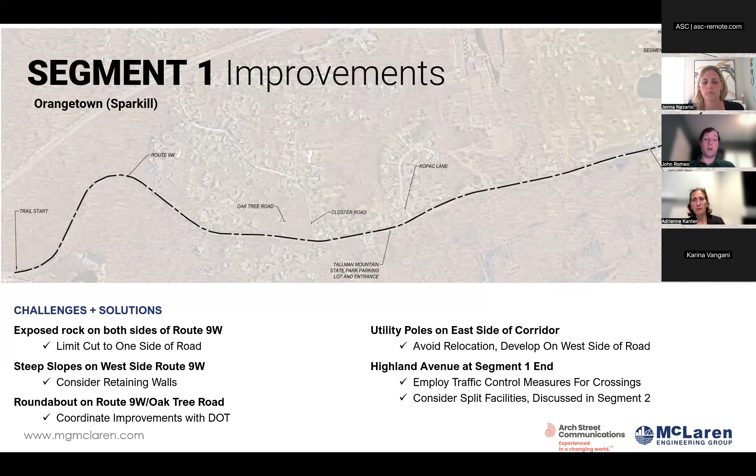Some of the other improvements we've talked about are warning signs for limited sight distance. As you saw on the previous slide, there's quite a bit of a curve, and we want to make sure people using this trail on either side of the road have safe ways to access it. So crosswalks, obviously with the Oak Tree Road intersection and all the problems there, that is going to be addressed. There are a number of other areas where we'll improve crosswalks, both the signage and with the addition of detectable warning strips—accessible strips placed on sidewalks to notify people that a road is coming and that there's a hazard there.

One of the things I ask all of you is to write in any recommendations for additional opportunities to connect. We have a lot listed here—trust me, there are quite a few more, but for the interest of time and space on the slides, we tried to condense this as much as possible.

Some of the notable ones in this area are the Lamont Earth Observatory, the Long Path, Tallman Mountain State Park, and the country club in Skunk Hollow. There are a lot of other items along this, and if there's anything you'd like to see us try to connect to with wayfinding signs—signs placed along the trail directing people—as well as interactive activities, please let us know.

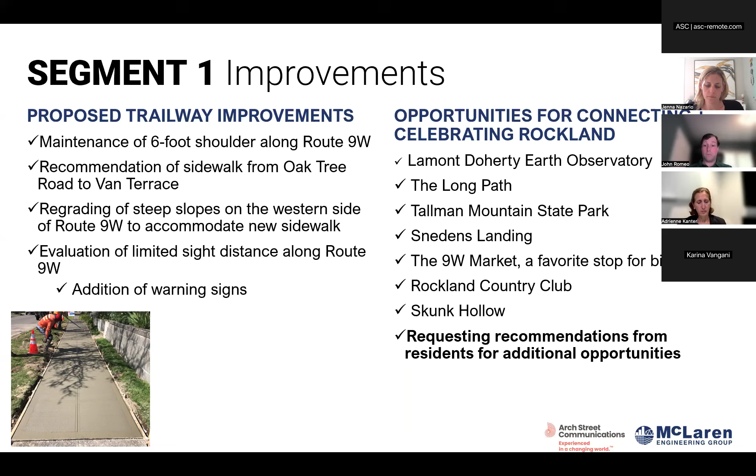Segment 2 picks up on Highland Avenue where segment 1 ends, going through downtown Sparkill into Piermont. This is a slightly challenging section due to the number of businesses here, and there are a lot of existing sidewalks and roadways. However, we have very, very narrow rights-of-way.

One of the initial plans of this project was to try to navigate people down Valentine Avenue. What we realized is that it's not really possible—there'd be detriment to the existing homeowners in this area, and we do not want impacts where we don't need them. So what we're looking to do, we've met with the mayor, and we're looking to come down Union and Main Street instead.

We're going to improve the existing sidewalks. Right now there are a number of telephone poles located in the middle of these sidewalks. We're going to be working with utility companies, the village, and the town to try to move these and widen the sidewalks as much as possible. Again, we're going to have improved crosswalks, improved signage, and anywhere we can improve anything right in our path, we're going to do that—drainage, other items, traffic control measures, things like that.

At the end of this segment, where we have the connection to the Joseph B. Clarke Rail Trail, there are a number of improvements we're going to be making to that intersection itself with enhanced signage. We are also looking to close the current entrance to the Joseph B. Clarke Rail Trail and direct it at a 90-degree angle. That trail currently crosses at a diagonal across this intersection, and from an engineering perspective, it is a hazardous situation for us compared to what it could be.

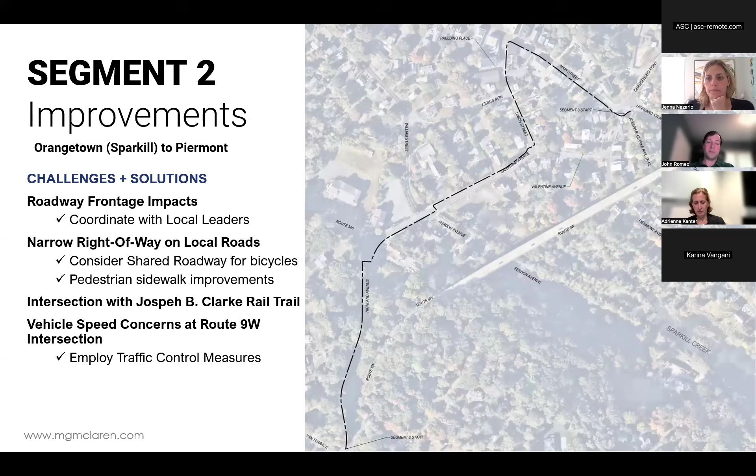Again, a lot of different opportunities connecting here. Sparkill restaurants, all of these types of businesses along here, we're hoping to include them in the wayfinding and in driving traffic. This is good for the community in that it will bring people to them, provide a safer path down to these items, and help the economic environment for everybody in the area.

New curbs, curb ramps, and crosswalks are really going to help people. And if we can improve the intersections and usability by moving poles and signs currently in the sidewalk, we really feel that this is going to be a boon to the community.

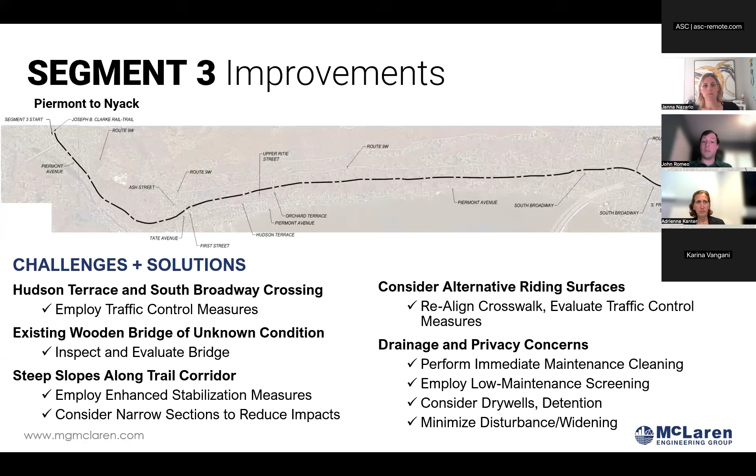Not specifically on this portion of the trail, but on some of the other trailheads, you'll see different wayfinding signs to other businesses. There are a couple cut-throughs to different businesses here, and we are looking to promote those businesses to make sure the community benefits not just from the trail improvements, but from the economic improvement.

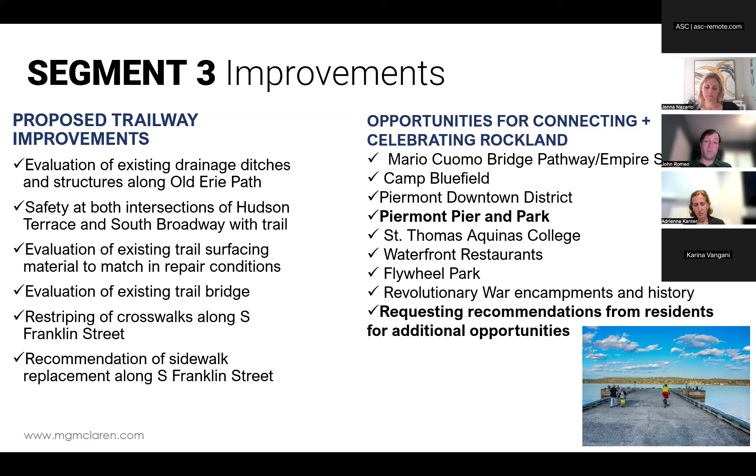So some of those connections we're going to be making: the Piermont Downtown District, the Piermont Pier and the park, St. Thomas Aquinas College. We're also working on a number of other projects, the Revolutionary War encampments and the Mario Cuomo Bridge pathway, where we will have direct connections. All of this is done to improve this existing trail section for all of the existing residents that live in the area. We believe they're going to be the primary beneficiaries.

Segment 4 is interesting in that we don't have a lot of major improvements in this area. Nyack and Upper Nyack actually recently went through some major upgrades to their infrastructure, widening roads, new sidewalks, new intersection improvements. So there's not a whole lot throughout the primary trail here.

What we're looking to do is actually split traffic. This is one of the only areas where we're splitting traffic with bicyclists and pedestrians, and that's due to the fact that we want to make sure that on North Broadway, we're promoting a quieter aesthetic. Everybody walking there, it's a little flatter, a little easier to go down, and because of their sidewalk there, it's better suited for pedestrians.

Whereas we can take the bicyclists on an alternate path to go down and meet up with them later at segment 5. This will also help connect the faster bicyclists who are going to be bypassing this through Old Mountain Road, where the existing state bike route is, back to 9W. So we have like 3 different parts of this.

One of the things that came out of discussions with the mayor of Upper Nyack is Old Mountain Road needs some improvements. There's kind of an asphalt sidewalk that goes along the path and leads to a small wooden bridge that needs to be improved, and there's some drainage concerns there. We're working with Upper Nyack to improve that, so we're going to have another connection to the school as part of this. This is one of those, like I was saying, not a pet project, but an adjacent project, so we can improve the safety and accessibility for the whole trail.

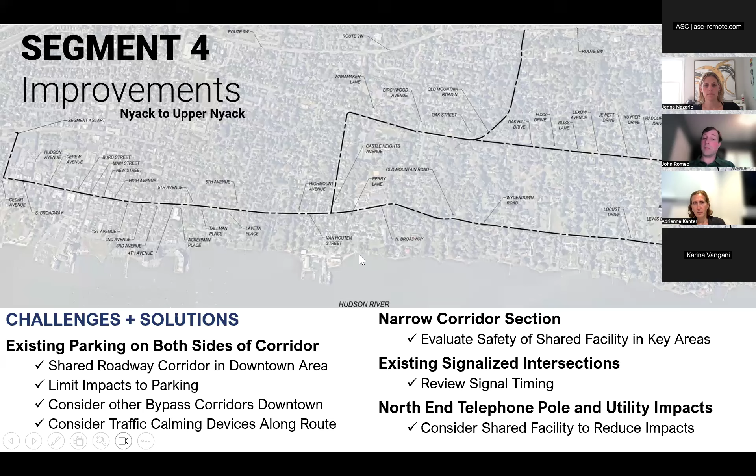So we can review signals and everything else in that area, or stop signs, a four-way stop sign, and other traffic calming devices that can help. There's other opportunities that we can connect in this area. In Nyack itself, I have reached out to Andy in the area, and he's going to come up with a better list so we can make sure we have wayfinding throughout the downtown. He's expressed interest in more interactive signage and items with QR codes so people can scan and get something right on their phone. I think that's great, and something we can do as we try to bring everything forward and be more modern.

We have another question here. Adrienne, I'm going to direct it to you. Yeah, great. So it's another poll question, and this time the question is: what safety elements would you most like to see along the trail? Please select all that apply. The options are widened sidewalks, shoulders, improved signage or signals around intersections, improved crosswalks, speed monitoring devices, improved drainage, and screening between the trail and private property. Please enter all that you consider important, and you have about a minute, and don't forget to click submit so your voice is heard.

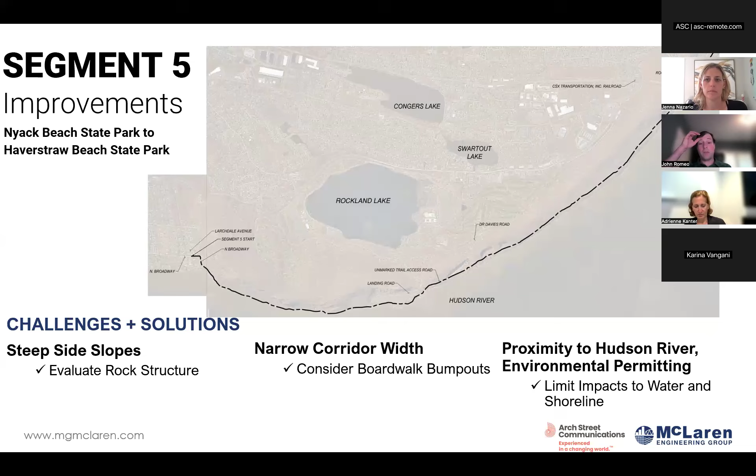The Palisades Park Group does a great job maintaining it already. We are going to try to assist them with improved drainage and other areas where they want it, and we're going to consider limiting other improvements in this area. We're going to have a number of benches installed. There are a bunch of historic artifacts and items that we can provide signage for, and we're going to provide different opportunities to connect to the different park in the area through this.

This is one of the things we did hear from the Palisades Park Group: segment 5 is actually a major commuting thoroughfare, and they want to discourage the use of e-bikes on it because of the danger they pose to existing residents and trail users. So this is something we're going to work with them on, to try to find traffic calming on the actual trail to discourage high-speed e-bike use. We don't want people ripping through at 30 miles an hour, disturbing some of the kids or folks using this trail segment. So this is an area where we are considering flashing signs. It's not set in stone, because that has an aesthetic detraction from the project, but if it only activates when people are traveling at a certain speed, we think it might be worth the improved safety it will bring.

Segment 6 is Haverstraw.

We have a number of different trail segments and options in Haverstraw that we are considering, some of which are not all shown. We are also working with McLaren KCI, as well as Arch Street, on a number of different projects in Haverstraw, so you might have heard us out and about. One of those projects is the Chair Factory, where you can see our bump out in this area where we have an alternate segment. We are trying to take into account other projects being built by others, or others we are also working on, to try to accommodate improved path options with this.

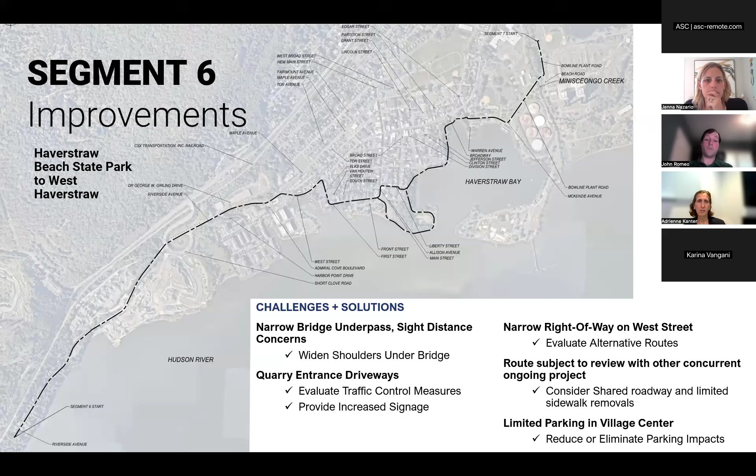There are a lot of different opportunities to connect here with Emmeline Park, where we want to try to improve Emmeline Park by having a separate trail come into it. We know that it is currently a safety issue for the fire department to try to access Emmeline Park and Donco Keys with the narrow road that's there. So if we can provide an alternate path for emergency vehicles, we are going to do that. That is something we're working on with Max Stack from Nelson Pope and Voorhees, who represents the village in this matter.

We are also looking at installing wayfinding signs to connect downtown. As I mentioned in some of the other segments, bringing people downtown will really benefit the community here, bringing everybody into all the shops, so this is something we want to do. We also know that the ferry here is something a lot of residents in this area might want to use to get to the ferry. It's going to improve accessibility to public transportation, especially with everything going on in this area in Haverstraw with all the new projects and new residential projects being built. Having this trail is really going to help accessibility.

So we have another question. Adrienne, I'm going to turn it back to you.

Yes, thanks, John. So this is the latest poll. When I use existing portions of the trail, I most often - please select one of the following options: use the trail by myself, use the trail with one or two other people, or use the trail with a group of more than two people. So please select the option that best reflects your typical use of the trail, and we look forward to seeing your responses.

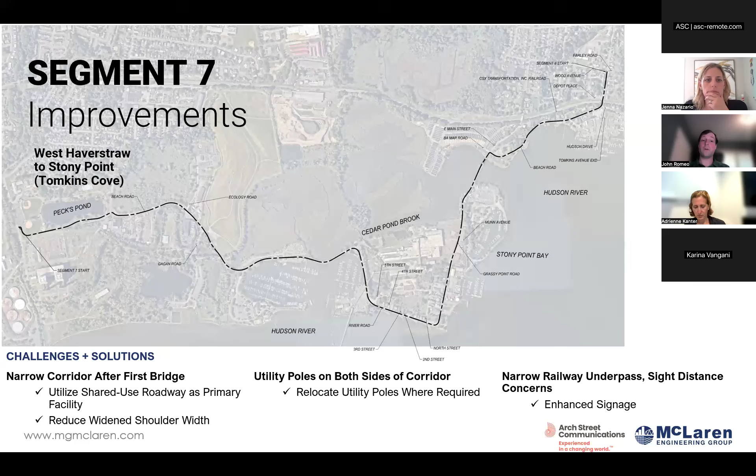Not a lot of residents live directly along this, but we understand there are parks that people go to, the marinas. People might want to walk down and be close to the water, and that's what we're trying to promote with this, as well as for all the residents who live on either end of this trail, since this provides a great connection opportunity for them.

The Haverstraw Bay County Park is right there, there's Bowline Point Park on the other end, and we have Eagle Bay. Some of the things we're talking about are maybe improving some fishing spots or improving flood management in areas where we won't need to widen bridges. Any other local landmarks, we will identify.

There's going to be a small segment of sidewalk installed to facilitate pedestrian traffic and make sure we're improving safety for everybody there. And we're evaluating sight distance around certain corners.

Segment 8: where segment 7 ends and segment 8 begins, there's a bit of a tough area I neglected to mention on the previous slide. There's an underpass where it crosses the railroad bridge. We're going to improve safety there by increasing signage and advance warning. Unfortunately, with the bridge being such a significant piece of infrastructure, we are not able to widen it, so we have to leave everything as is.

Segment 8 is going to be another light-touch area. We are bringing this through a residential community and looking to only provide signage there. These are public roads, and we don't want any sidewalks here. We think this will be a great way to connect people without being on 9W, but we understand there will be some concerns from people in this area. We're happy to take any questions and speak more directly if you have concerns.

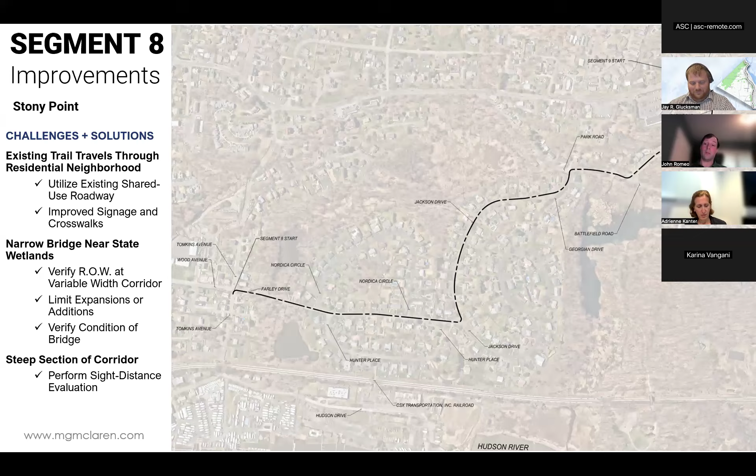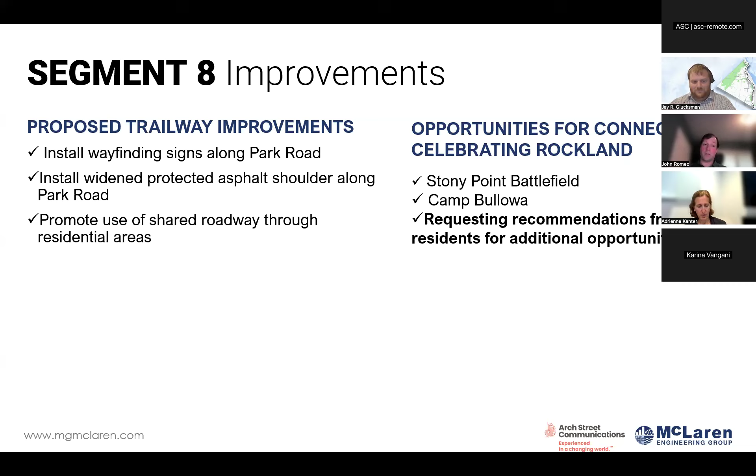As Jay mentioned already, we had the opportunity to connect with Stony Point Battlefield and Camp Bullowa. Any other recommendations you have? We are open ears. We wanted to have a light touch with wayfinding signs as well, and we want to protect all the residents with that widened shoulder.

Thanks, Jay. So this is a different type of question. We're going to ask you to fill in the blank here. And the sentence begins, and you will complete this sentence: I wish that the Rockland Riverway Trail would have... please fill in the blank.

Some ideas of things that you might want to contemplate, but you should certainly choose what you're interested in, would be, say, benches or a bike repair station, shade, canopy. Those are just some thoughts, but please contribute what you think is important to you.

We look forward to seeing your responses. And of course, if there's more than one thing you'd like to see, by all means, just include both, about 2 or 3. Please don't be shy. We really would love to see what is a priority for you.

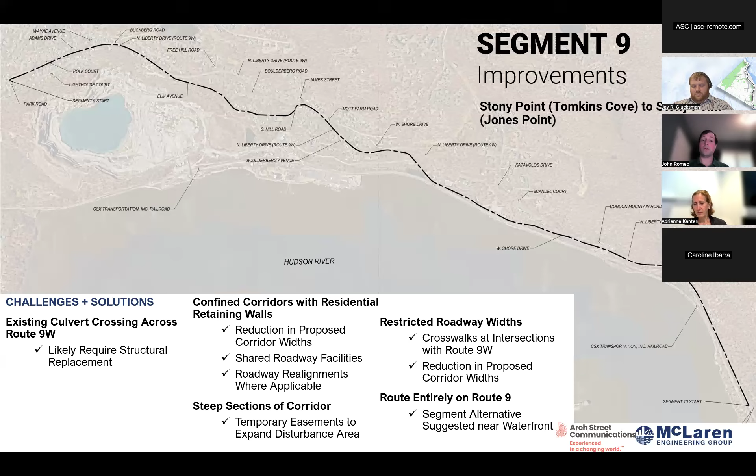So at West Shore Drive and Mott Farm Road, we're going to be looking into doing some improvements that we've already discussed with DOT, with signage, crosswalks, and the like in that area.

Segment 10 is an existing trail, in Stony Point on the Jones Point path. Again, this is the same entity that runs segment 5. They've identified that for their trail, they don't see a need for major improvements here, other than maybe some drainage structures and making sure we are cognizant of users on this trail for the e-bikes.

One special note is that there is no parking right at the trailhead, and the town has had issues in the past with people parking there anyway in front of people's houses. So we're providing increased signage and wayfinding back to the existing parking lot near 9W. Technically, Jones Point Path starts much further up from where we're showing our segment 10 start, but we'll have wayfinding this whole way. If there's anything we can do to further improve that, we'd love your feedback. We're already working with DOT and the town to try to improve the signage and parking accessibility, so we don't have issues for the residents to deal with.

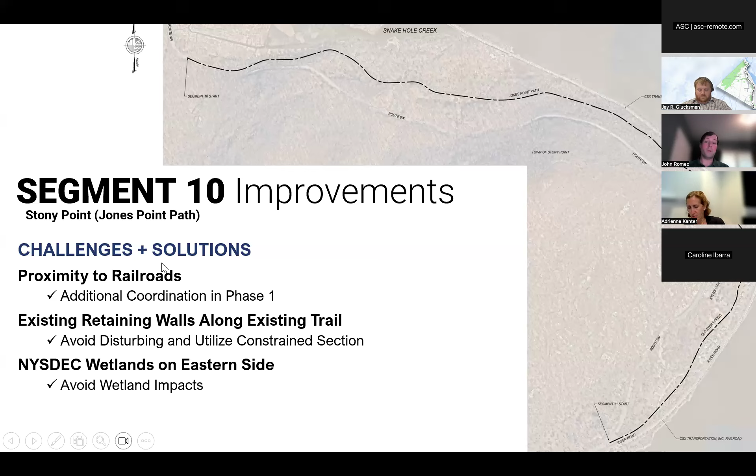There are a number of wetlands in the area that have really limited our work here. Other than maybe some benches and some beautification, there's not a lot of structural improvements we're going to be making on this trail, as it's already a great area. One item I mentioned is e-bikes. I don't think this area has a lot of e-bike use, just due to the fact that it doesn't connect to anything in particular for commuting.

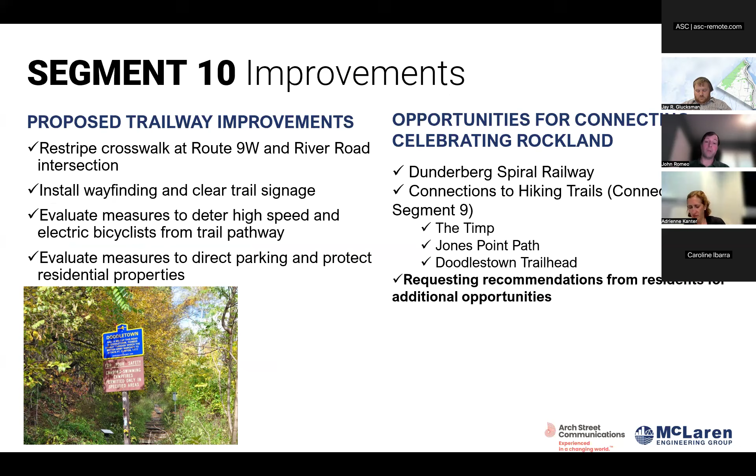A couple other items on the other side of this that I'll mention are the Doodletown Trailhead and the TIMP. But in the next segment, segment 11, I'll really get into the different trails.

Segment 11, initially, was our last segment. We had initially envisioned going all the way up to Bear Mountain Park. The problem is it's not quite safe to direct people up there. Anybody that wants to go up there will have to do it at their own risk using Route 9W and the existing bike path that's already there. The south entrance road is steep and narrow, and any improvements to it would require massive impact to the environment, which nobody we've talked to really wants to see happen.

So we've done a light touch here, and what we did is pivot and come into the Iona Island access road to get to the park over there. There are a number of other projects being developed with different trails through the wetland areas and marshes, and this will hopefully provide greater access to that.

There's also a nice parking lot there that will be really nice for people to park on this end. There are parking opportunities we're incorporating into this whole project, so there are no impacts to existing residents, and they can park at several areas to access different portions of the trail. We're looking to evaluate the stormwater runoff in certain areas coming from 9W to make sure it doesn't get into the Jones Point path. Our work in this area is really limited to just wayfinding for the most part.

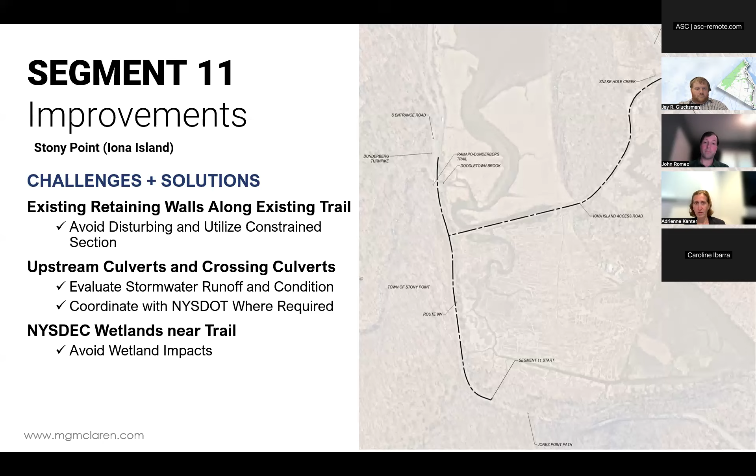That is our last segment. So with this, just to mention connections to some of the other items in the area - there are a lot of other trailheads that connect to this, but we are not going to be improving those trailheads or anything along those lines.